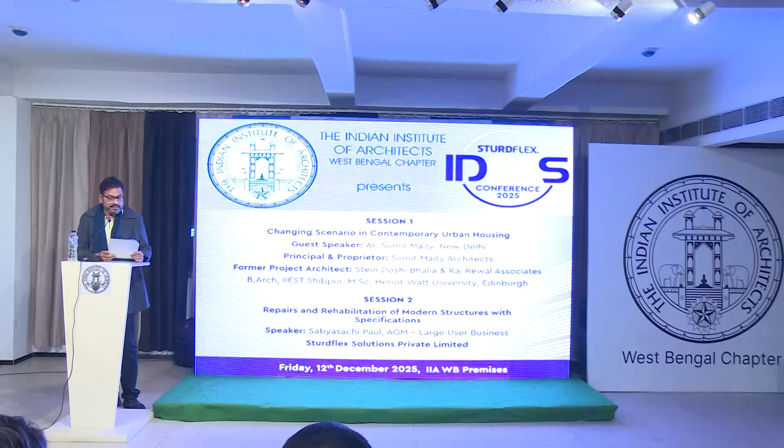Architect Sumit Maity briefly served as a visiting faculty at the Sushant School of Art and Architecture and has delivered invited talks at various prestigious institutions and forums, including Indian Town Planners Institute, TVB School of Habitat Studies New Delhi, Indian Institute of Architects Convention in Surajkund, BMS College of Architecture Bangalore, NWPBC Convention, JNTU Hyderabad, and many more. He has also served as an eminent jury member at key industry platforms such as the IIA West Bengal Chapter exhibitions and IDAC.

These are just a few accolades, achievements and projects to talk about architect Maity. I'm sure we are eagerly waiting to hear more about his projects.

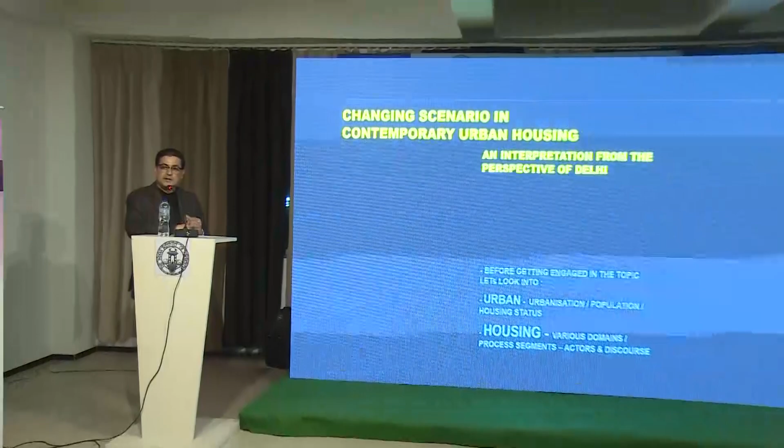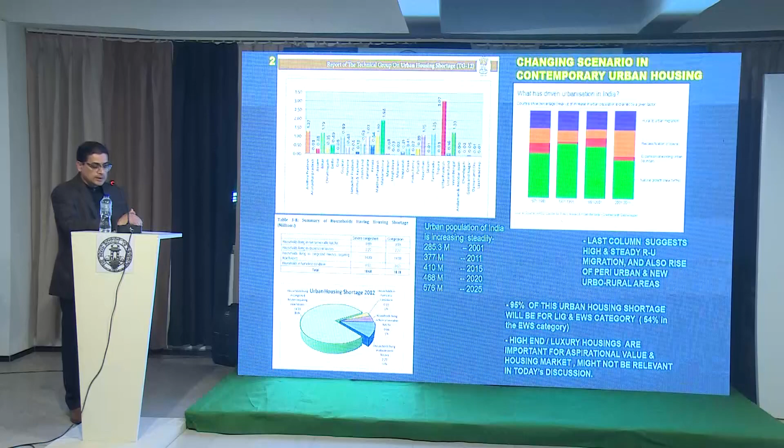So today's topic is the changing scenario of urban housing. Before getting into it, let's first look at the two parts - urban and housing - to understand what exactly these are, so we can narrow down our discussion. Now, when we talk about urban housing, first, if we discuss the urban area, it's a little awkward.

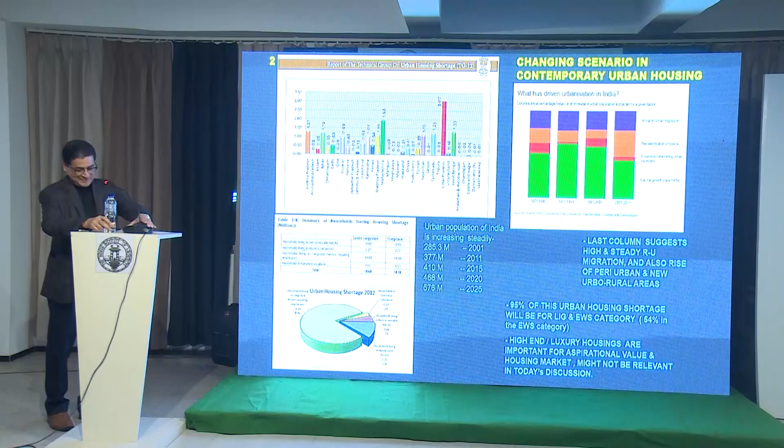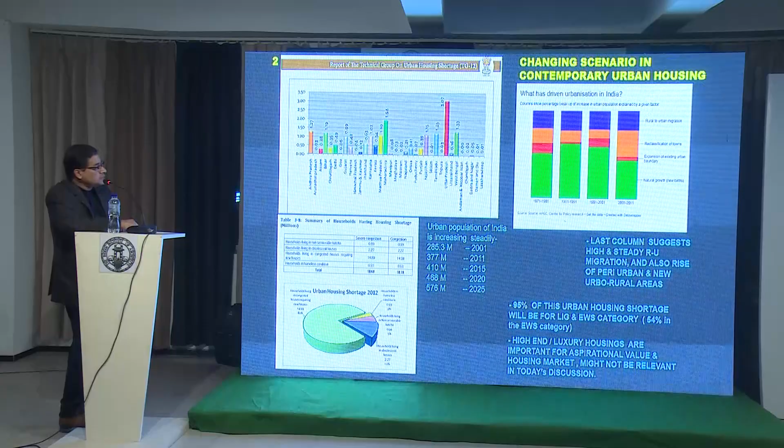Actually, I can't really see the screen. I'm afraid I have to still use this particular TG12 report, done in 2012 - the report for urban housing shortfall. If you see all the states where we have this data, there's about 18.78 million houses shortfall. I don't know really what 2022's 'Housing for Everybody' has achieved, but I believe the shortfall is still there.

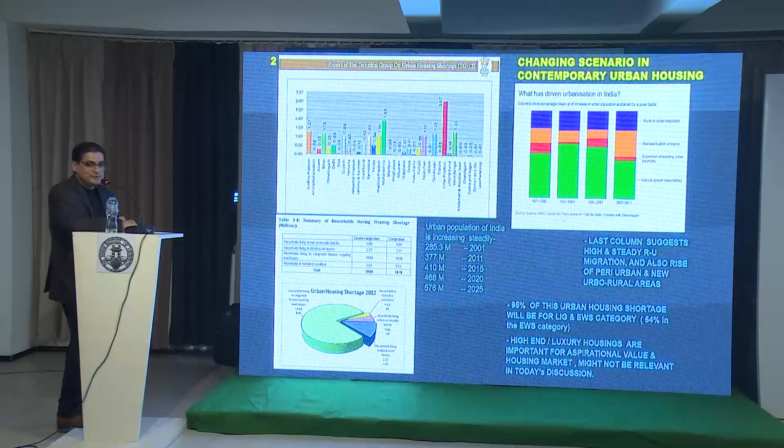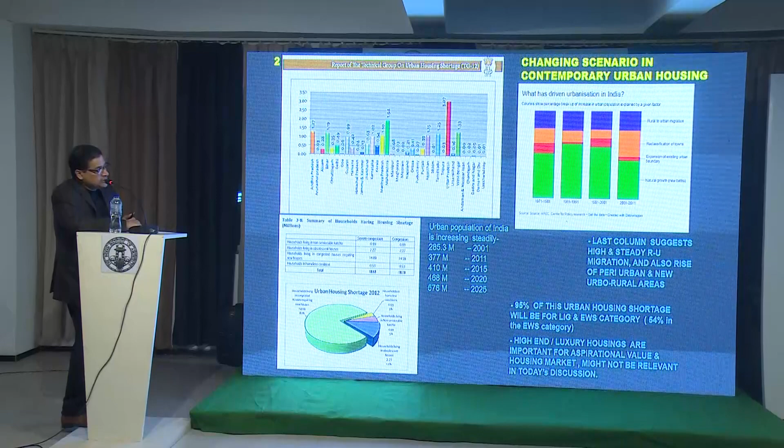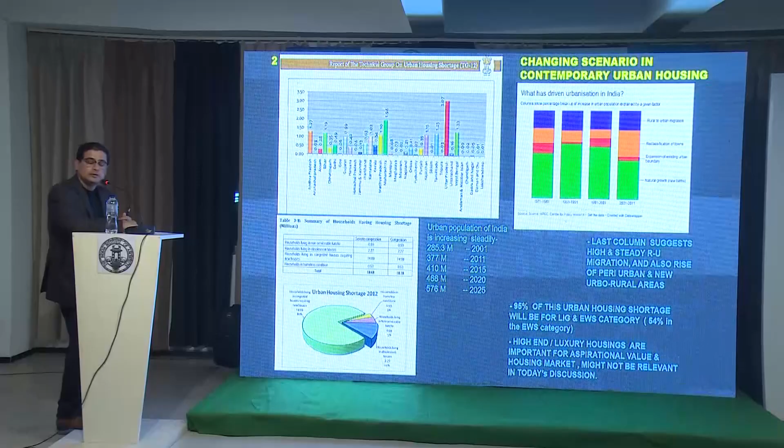Now, why the shortfall, and what about urbanization? The graph on the other side shows the urban population and how it will increase, and the reason for that. At the top we have steady growth from rural-to-urban migration. The last column shown in orange is the reclassification of towns or urban areas - in other words, the amenities in peri-urban or urban-rural areas have improved so that now they can be termed urban areas.

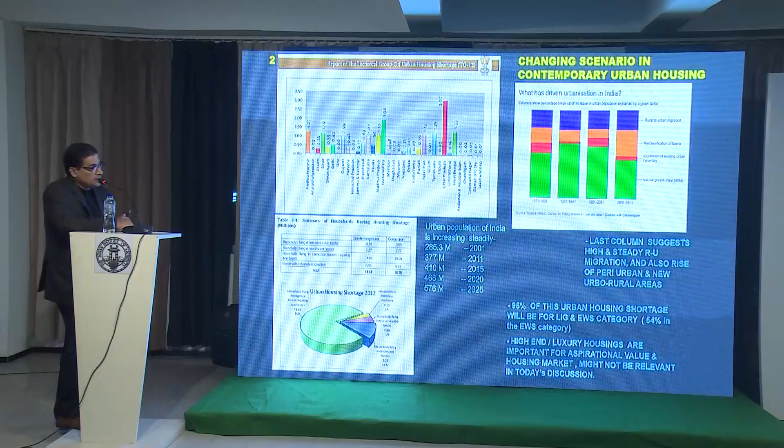Overall, the urban population is increasing, and the moment that happens, land - a limited resource as we all know - is going to be impacted. Now, of the overall 18.68 million shortfall, 95% of that figure goes to the LIG and EWS category - that's basically the urban poor. In fact, 54% of that is for the EWS section.

So what I mean is, when I talk about urban housing in a real sense, we need to address this particular issue. Otherwise, the high-end luxury segment housing, while aspirational, doesn't really give you the right picture.

One small thing here, probably not exactly straight away. Maybe the next slide would be a better choice.

10% of the population, all over India, not only Delhi or Calcutta, held the wealth of 60%. That is something which governs the urban housing market economy, because this segment is very lucrative for private builders to get onto. But the 95% requirement is never addressed by private developers, so government needs more engagement with this sector.

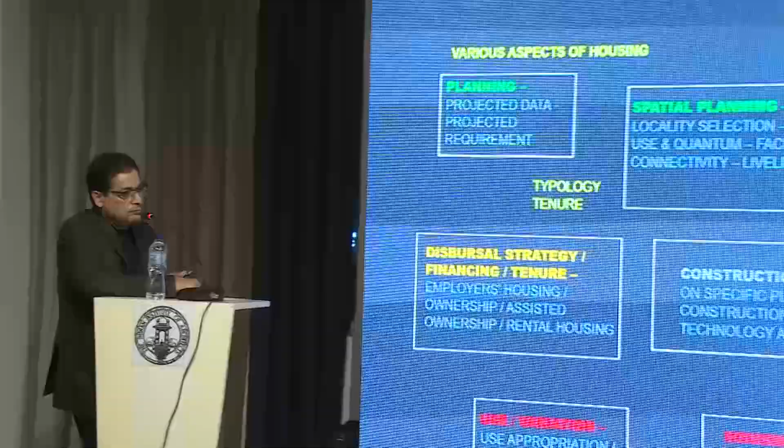Next. Alright, so now when we talk about housing, let's look at the complete scenario. It is not something much bigger than what we see, not only the building blocks and all. The decision makers are actually at different levels. There are various domains in housing, and since I'm addressing a knowledgeable audience, everybody wants to know that. So the planning situation, when they talk about data and projections and requirements, accordingly we pick up things like the 95% requirement.

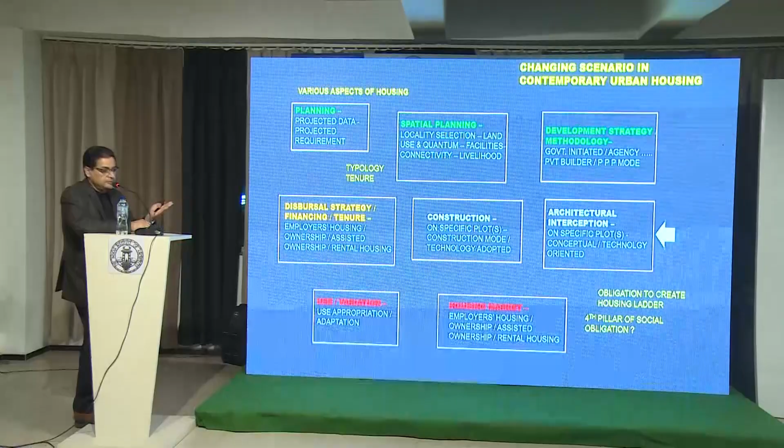We are simply saying we have data and planning data. Then the next possible situation is spatial planning. I'm not really using the term land use plan anymore because that is getting a bit awkward. Now, where you will require the land to be marked, the use to be defined, and accordingly you will have the area, ground coverage, density, and other things. So those are the policy decisions which are made.

Then comes another domain for development methodology and strategy, when you have financing, whether you go straightaway government or establishment-backed project or with PPP and other arrangements. Out of that, there will be intervention of architects, and then obviously with that there will be several other issues, what kind of project it is, whether we need technology-driven solutions, faster delivery, and so on. Construction is another issue.

Disbursal would be another huge domain basically, the way you need to put these things, whether it is ownership or it's going to be rental housing. Rental housing is hardly present here in India. And the other ways are assisted housing, ownership, and all this stuff.

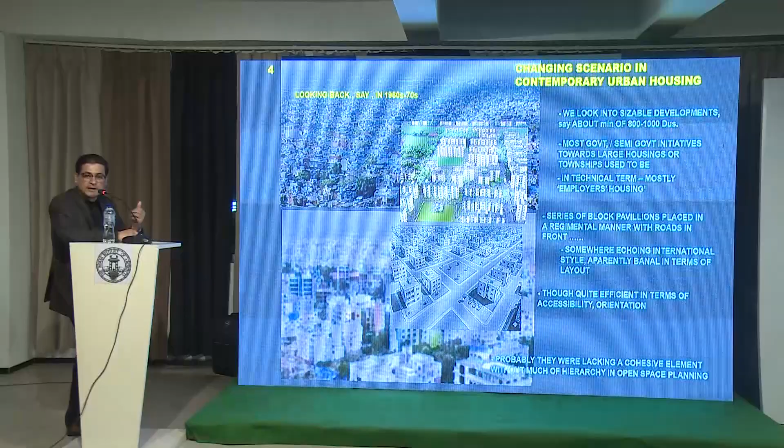Those were the advantages, somebody can say. All the buildings used to have the right orientation, access right up to the doorstep, and complete open spaces and all.

But somewhere people thought that probably it was somehow following the international style, the Bauhaus pattern sort of thing that you see everywhere in other countries. So what was missing? Does it mean it had somehow lacked some kind of inspiration, or the Indianness?

I could show many, but just one or two, three, four images here only to come out with that. So in the late 70s, 80s, we started seeing some other kind of layouts which were not exactly like the typical township pattern.

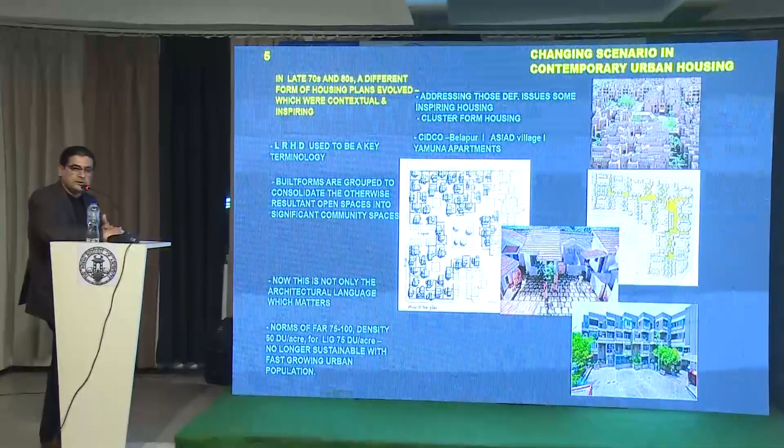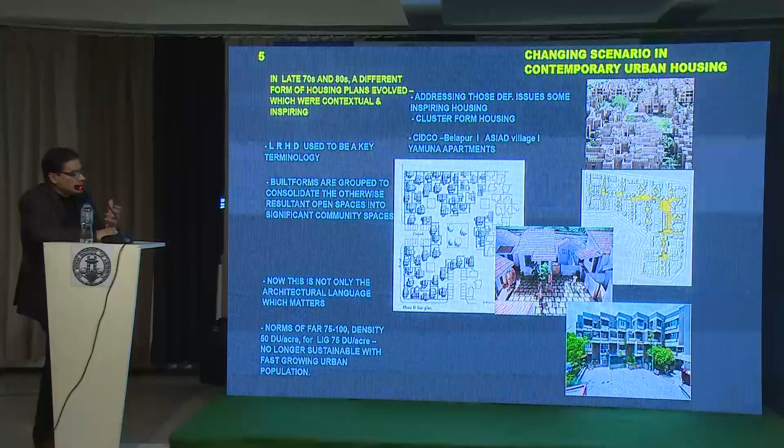You all know these images, they are very well-known. Typically, when we started seeing cluster housing, we see the community spaces as sharing spaces, how that happens. The hierarchy of open spaces - first an enclosed open space, then semi-enclosed, and then eventually a larger community gathering space, like what Charles Correa did in the development.

I won't say this really qualifies for today's discussion because it was not that big a project. In terms of numbers, we should look at projects which are possibly around 1,000 dwelling units - then only it will make an impact.

And of course the other one we can talk about is the Asiad village. We see the pedestrianization, the way the clusters are there - complete proper order in the open spaces, increased open spaces and all.

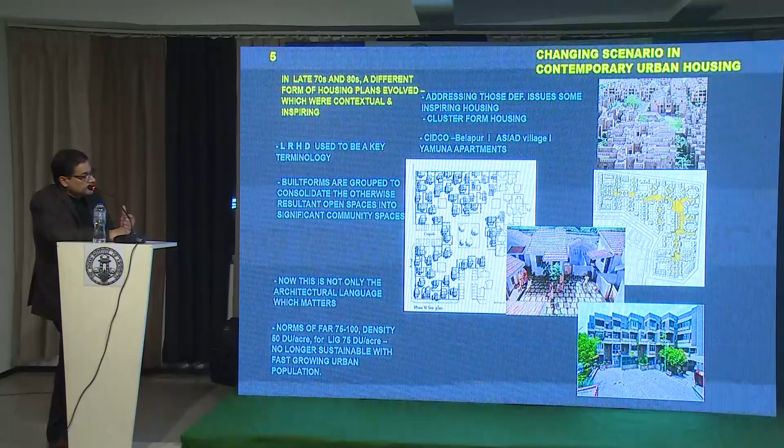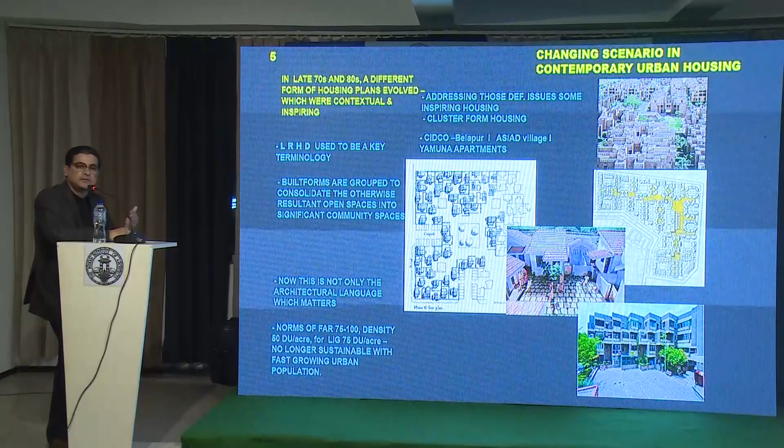And there are certain other small houses, again the same thing. It may not be really that big a project, but it was giving some kind of direction - that housing should be something which actually creates a community feeling.

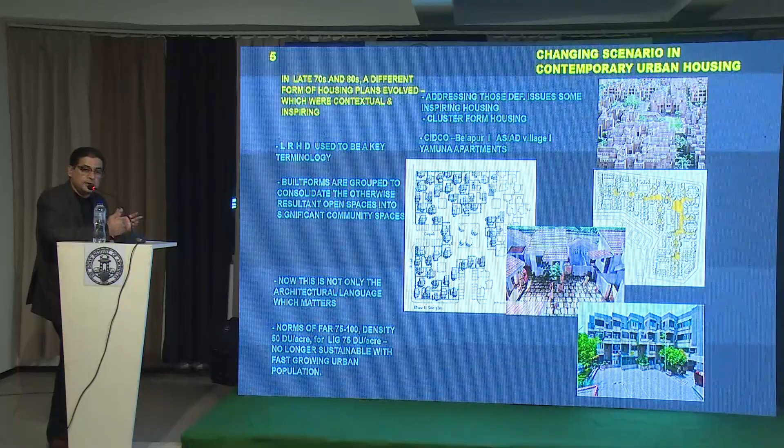Then we learned to figure out the use of open spaces, because our climate is quite friendly, unlike the West. So we could use that open space for various uses, not only at the ground level - even the terraces could be used that way. There are certain other antitheses also to that, but we'll come to that later.

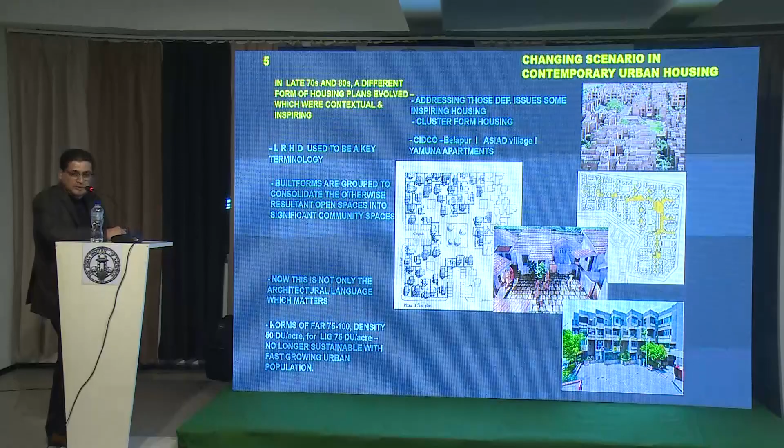So this is the thing - but we must understand that when we're talking about the 80s, the norms were still like this: the FAR was hovering between 75 to 100, and the density was barely 50 odd dwelling units per acre.

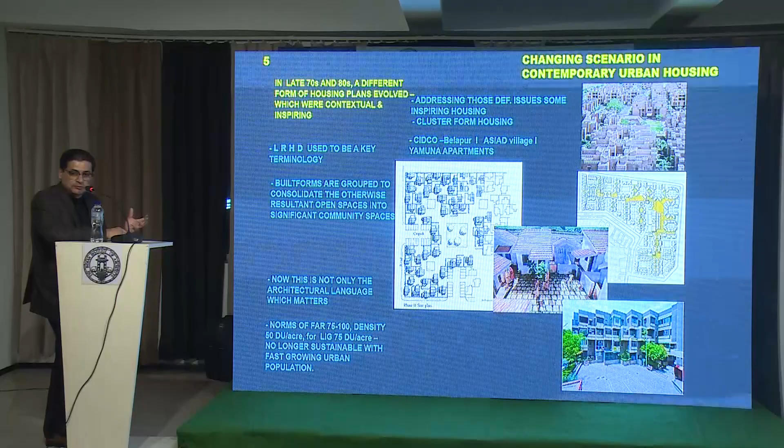But you have seen that graph - the population was increasing, the density was increasing, so we were getting tremendous pressure on the land chunk. It was not sustainable that way. So we could see how it needed to evolve.

So this is the thing basically - during that time it was '99. This is the competition that we won, for Vasant Kunj. It was a 25 hectare site, divided into two parts, and in total it was aiming for 3,000 dwelling units.

What we had done was basically several clusters, designed so that they shouldn't be too big or too small, to have the community feeling. Maybe we were lucky enough to figure out the particular quantum. Someone in another lecture asked me - out of 120 entries, we were the only ones who could give 3 big, large green spaces in this particular project.

So we tried a mixing approach. One part was HIG, then another cluster was MIG and LIG, and another was LIG and EWS. So none of the clusters except for the HIG were actually similar, they were mixed. HIG was similar only because at that time DDA had a different strategy for this HIG - they used a self-financing scheme. That's why it was separated. Otherwise, we were always intending to mix the houses.

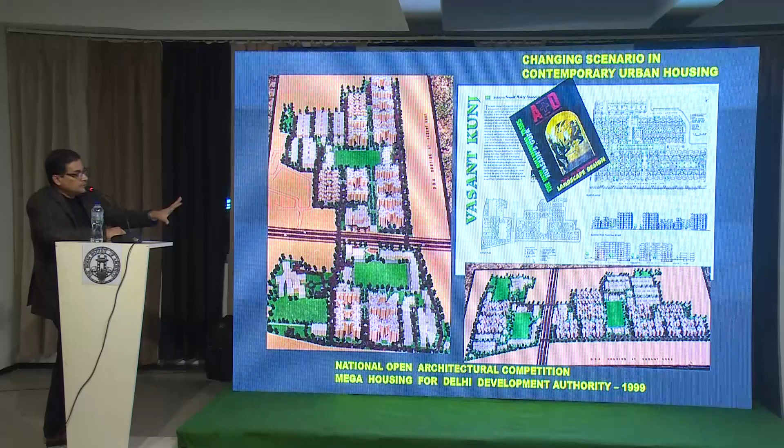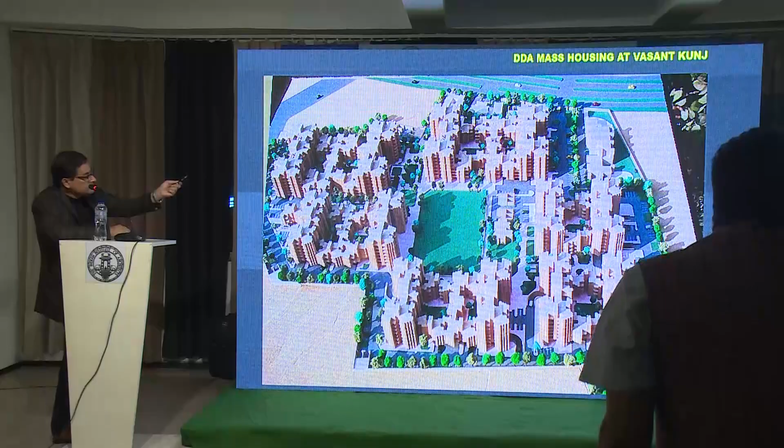So anyway, based upon this, we did the next project. This is a constructed project on the same basis, because we were asked to demonstrate the same clusters done in the competition. Here also, this particular site is 8.1 hectares, if I remember rightly, with total 215 units - 3 BHK, 2 BHK, and 1 BHK. Over there, those 2 clusters are the HIG 3-bedroom clusters, and these 4 are the mixing of 2 BHK and 1 BHK dwelling units.

Now you see this, what we have done over here. This particular area is quite close to the airport, so the FAR was about 150, but we could not achieve that because of height restriction. So what we tried to do over here was mix the clusters - we cleverly mixed 8 floors and 4 floors together so we have balance. Number 2, on the 4th floor area, the lower height, you have a completely separate deck where the entire cluster is tied up.

Otherwise, another thing - I think next, this is a better choice to show over here. Now this is the site plan, so we'll see the flow of the open spaces and the pedestrianization and the vehicular circulation.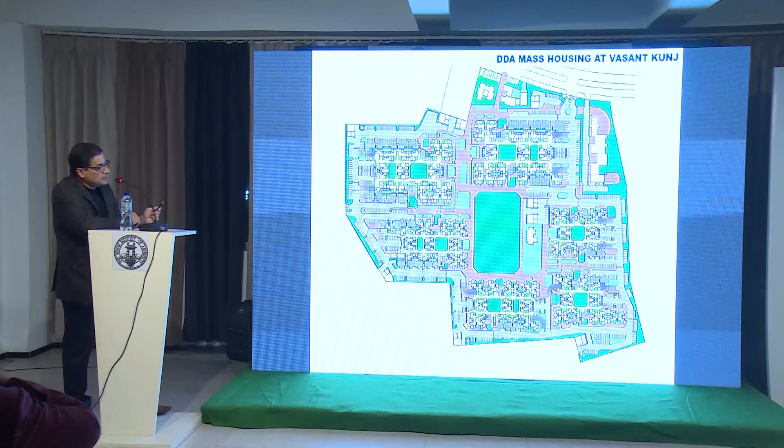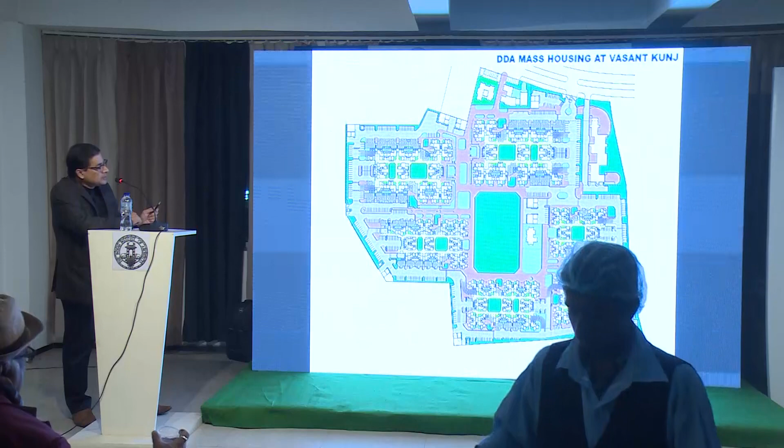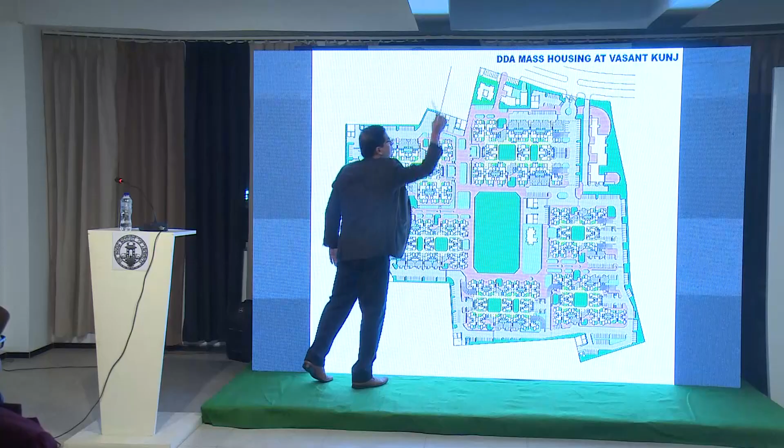Now the system is very simple. The entire vehicular wing goes on the periphery. We have some cul-de-sacs, and this entire pedestrian circulation network is tied up with the city straight away to the bus stop, if you say so. If you see, this entire goes into the main road, right up to the city transport system. Next, these are some views actually, so you'll see the way the 4 floors and 8 floors are combined together.

Next. You can probably see a little bit of this inside the courtyard. You'll see this gateway sort of thing, basically, which are the interlocking courtyards and all.

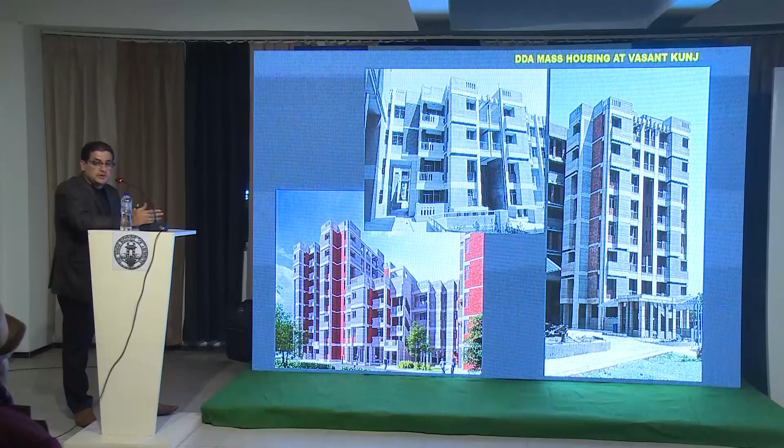Now over here, as I already told you, we could not achieve the complete FAR, but the excuse was basically that due to the vicinity of the airport, the height was restricted to only 8 floors. But somehow the interlocking courtyards, open spaces, community space and other things, we tried to create in the similar inspiration, if I say so, that what we had learned before.

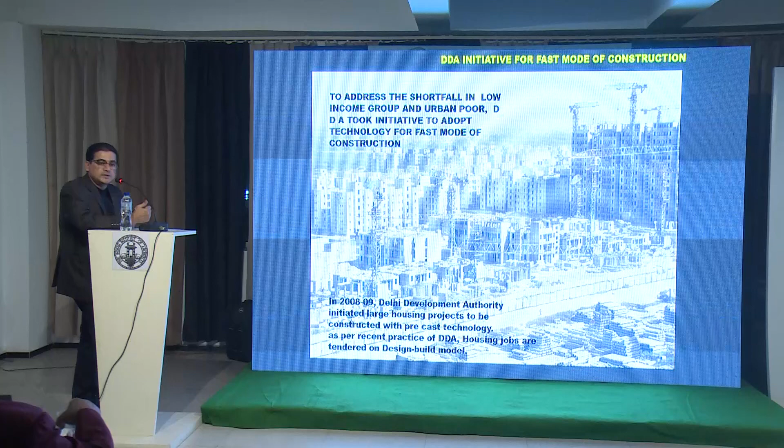Next. But what about the 95% urban poor, for that thing? So we thought we have to give a very fast delivery system, we have to go for this EWS category. So they first came up with a proposal for making 20,000 houses, spread all over Delhi at 9 pockets. And a prefab system was suggested by them - it must be on the prefab structure.

Next. So the challenge here actually was this: you have to create one particular prototype that fits 9 pockets.

The FAR was 200. Engineers simply calculated that 5 floors would be there, because it was G plus 4 without lift for the EWS. So 40% ground coverage, 5 floors, 200% FAR done.

It took time for me to explain to them that 40% ground coverage is not achievable in any way. So they figured this out and eventually accepted the proposal, but we are still 20% down. The thing is, it was a walk-up apartment, so it had to work between these constraints. That is number one.

Number two, there were several other issues like the prefab, because there were certain parameters for the cranes and crane movements, the material, eventually installation and other stuff. Eventually our average ground coverage came out to 33% or so, so it was quite densely done up. So those things had to be seen.

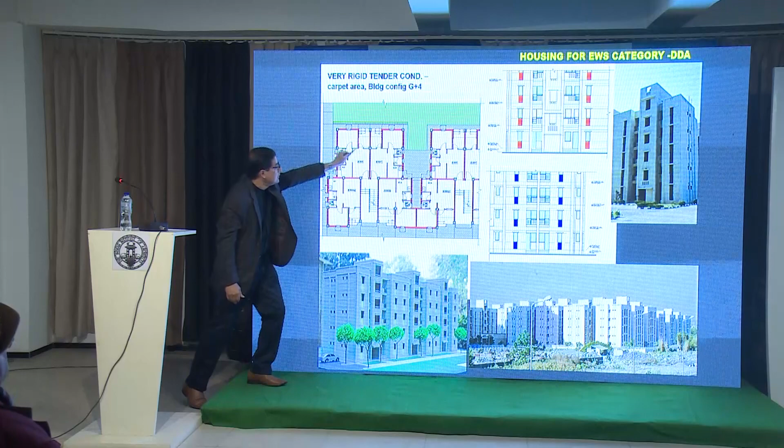In the interest of time, we can save the other questions. I'm sure our main audience will have many questions, so we can save all the questions and take them up later, otherwise it will unnecessarily get extended.

We'll definitely discuss that particular issue.

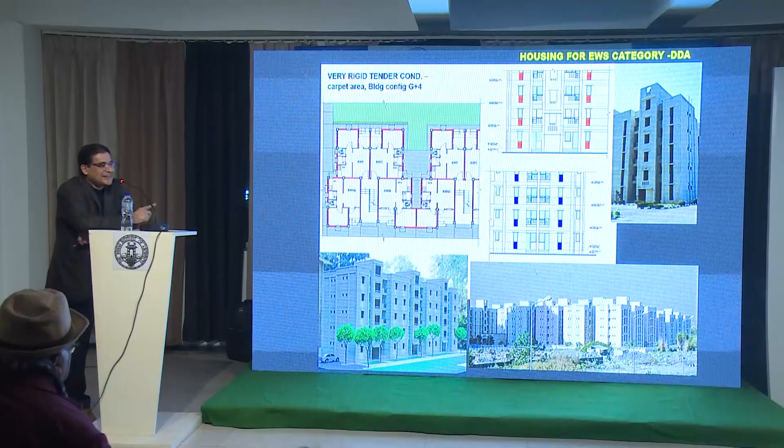So we come back to this, we have done 9 pockets. This is one I'm showing just as a reference. In fact, this was the largest one, about a 10 hectare site that we were looking at. This particular site had about 4,200 units.

Now you see the thing, you will hear what has happened. The kind of building blocks here were basically one complete module, like an industrial production sort of thing. So then, where from, how can you actually get those community feelings and all?

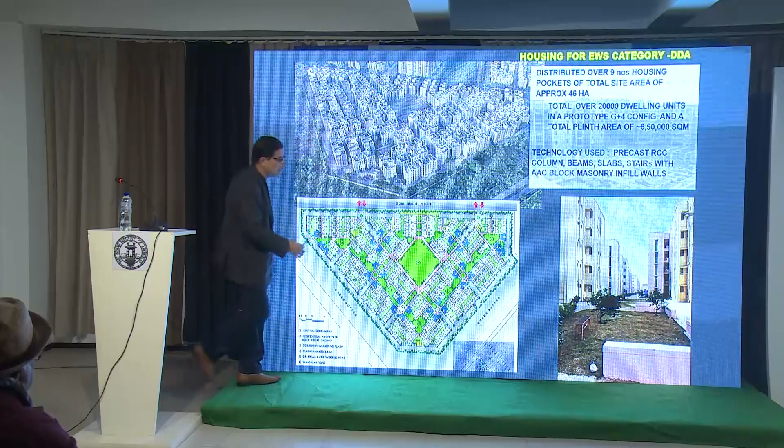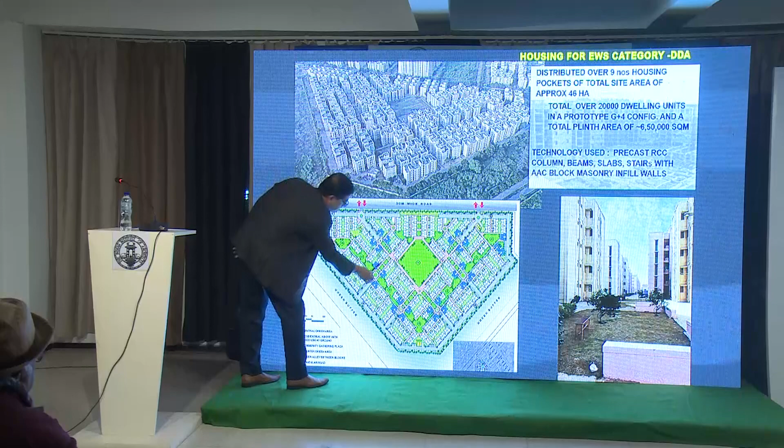If you see here, there are 2 entries. From here you come in, so this is the kind of connection. And then this is the other connection, which comes to the community, eventually to the central green area.

Which one? The blue ones. Yeah, the blue ones have the commercial activity at the ground level. That's what makes this particular boulevard become a little animated. Otherwise it would be like a...

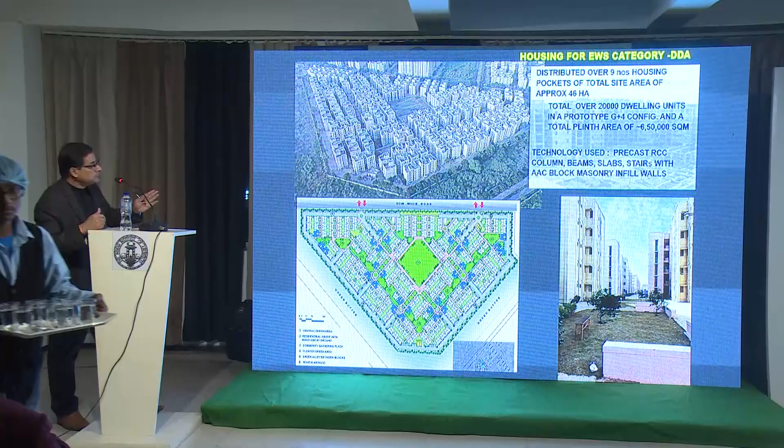That's how we did this, and generally speaking, across all the sites, we must point out that at that time, the norms here, the density and the FAR, the two things we always talk about. For the EWS category, the density was 600 dwelling units per hectare.

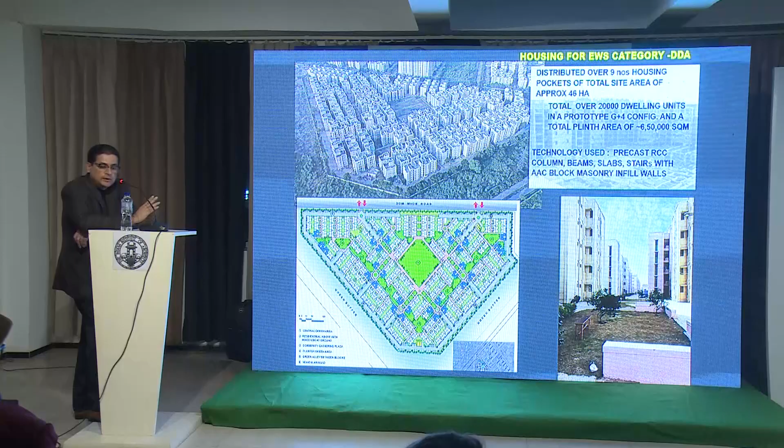So of course we could not achieve it. We were somewhere around 500 to 520 odd per hectare. And FAR also, as I told you already, we eventually did something between 160 to 165, because otherwise this particular model couldn't be sustainable.

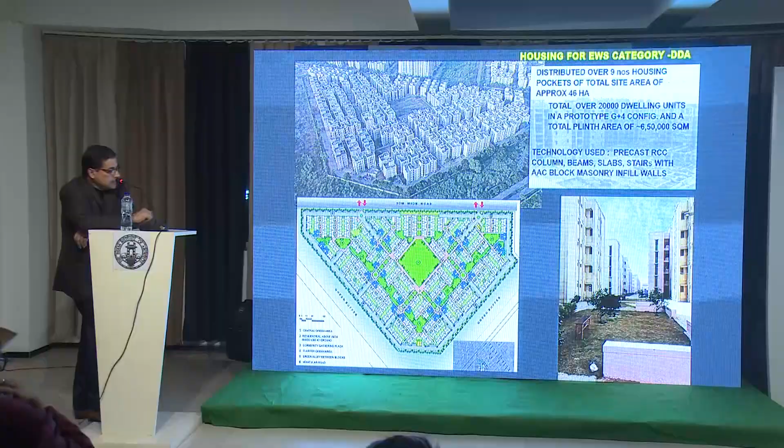Next. So then we came to another situation where they included the LIG, which is basically one grade above the EWS category. This was for 10 pockets actually.

In fact, our site plans are put on the Google map. This is one particular area, this is Narela, these are sectors G7, G8. You will see about 6 pockets were here, and over there also, this is G2, G6. Same thing, they wanted this on the prefab system.

Now the problem here was that the 200, because the height restriction was worked out, so we had to go for 200 over here. Now this was a little tricky.

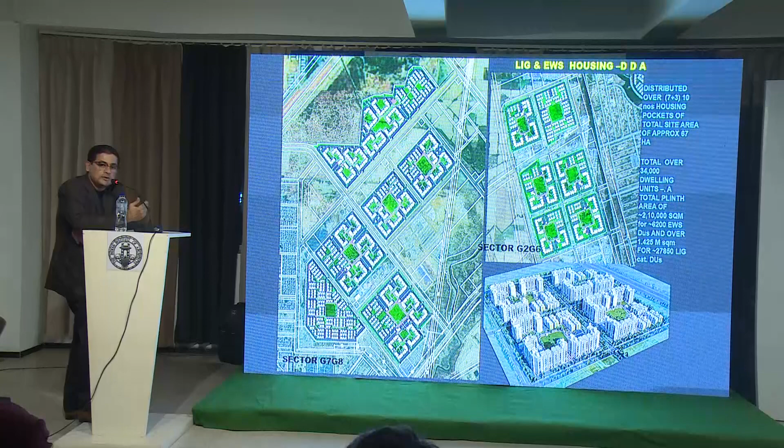For the prefab system, we had to go for a similar module for all. At the same time, all the sites are of different size and different geometry, so how do we get into that particular situation for actually always achieving that 200 FAR?

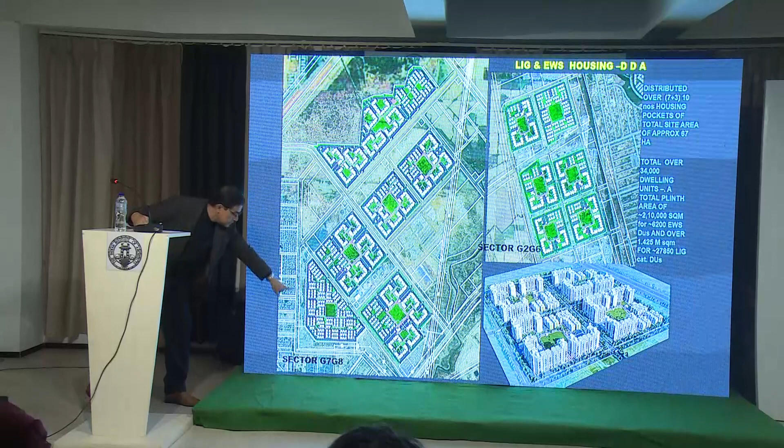I'll explain that, but before we go there, let's see all the pockets. This is the site you saw before, this is the EWS site. Now, all the EWS pockets, you'll see the way the clusters are formed. The LIG blocks were of 13 floors, and for the EWS part, we went with a similar situation that it has to be G+5 without any lift, so they remained in a similar kind of form.

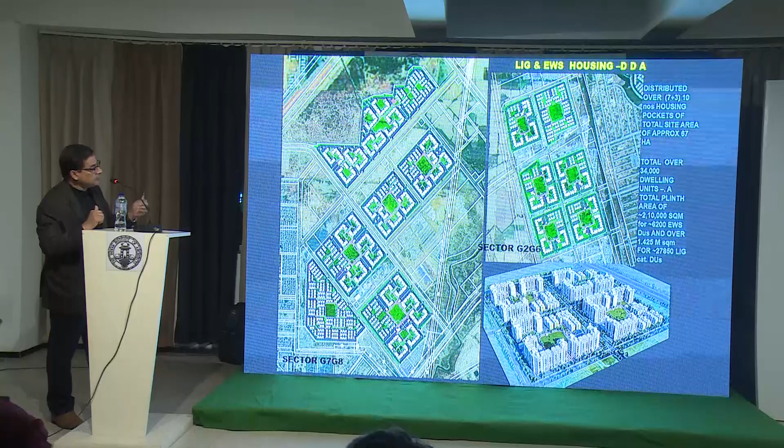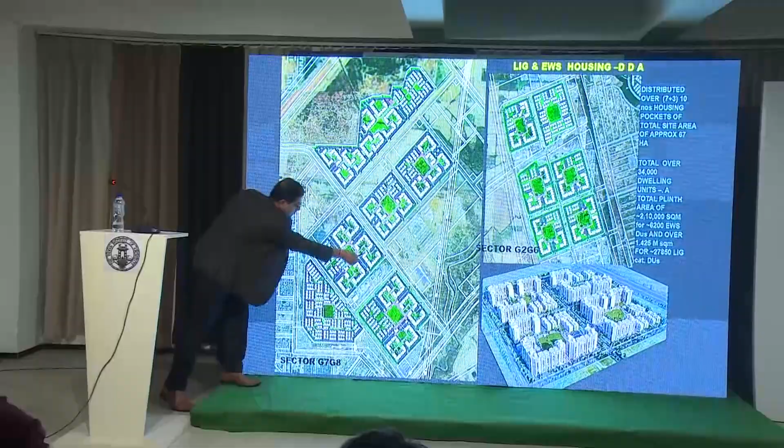Now you see the way we try to do that. We try to create the clusters which are open, eventually connecting there and there, again connecting to the central one, the peripheral vehicular ring, and then the cul-de-sac parking. So it's a completely pedestrianized city core.

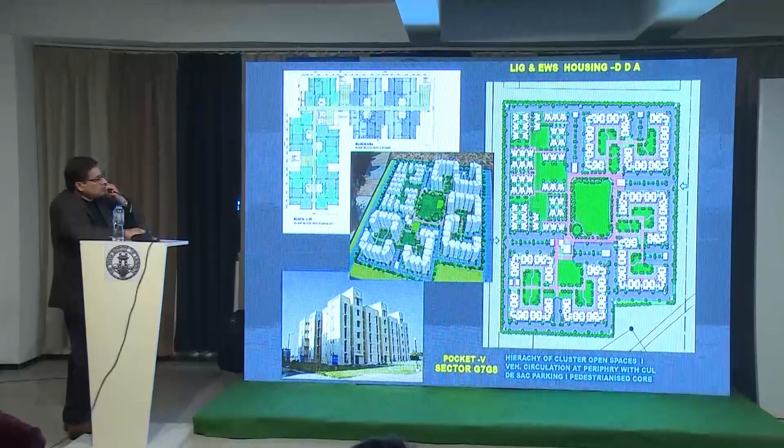Okay, so this is one pocket you can think about. This is a pocket of about 11.5 hectares. I believe the total units are almost around 4,000 odd. So you'll see in detail the way the blocking and the open spaces are actually created in between.

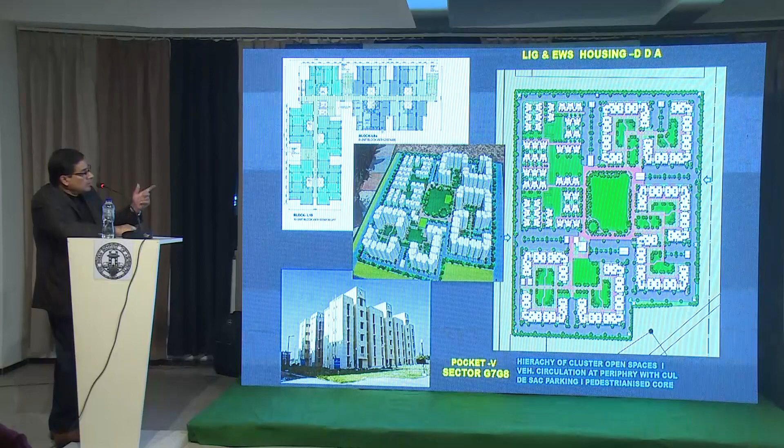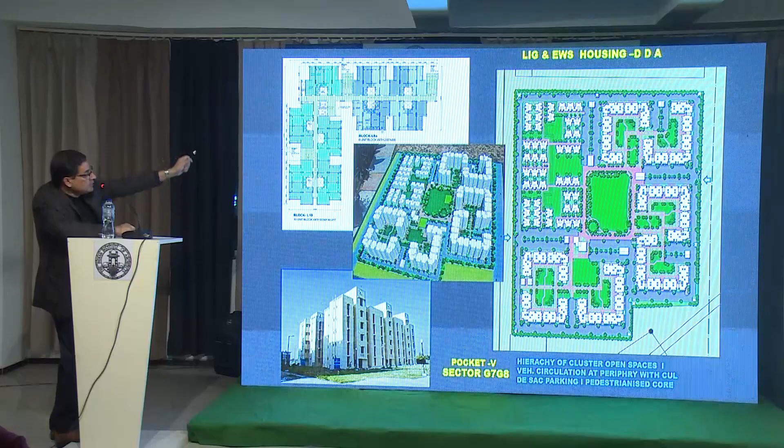Okay, this is the typical LIG block, where we have the lift somewhere, and the staircases are marked that way. Now this is the way we had done next, this is actually the thing that we had done.

We had created one module, L10, meaning this particular thing would be with 10 units. Then L8, that is 8 units, with a staircase or without a staircase. So none of these blocks actually qualify to be a building by itself, they lack something, either no lift or no staircase. But when combined, if you combine three blocks, 2 L10 and 1 L8, then you get a complete building. Add 4 blocks, you get another system, 5 blocks another system, 6 blocks another system.

So that's how all these things differ across all the sites you have seen. We use that approach so that eventually, if the target is 200, we achieve that much. In this particular project, we are talking about 34,000 units that we've done across these 10 pockets.

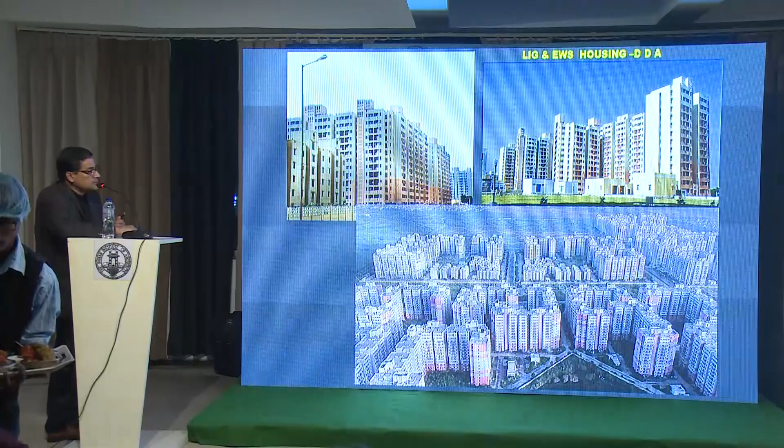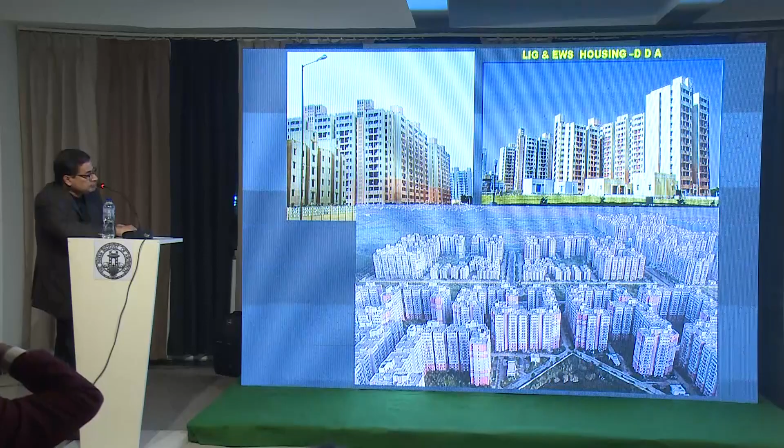So this is a view, if you see, this is sector 11, G7, G8, and this sector 5, sector 6, which have been seen. This is the street view and that's the courtyard side view of the LIG block.

So that's the elevation of this pocket 11. The same similar thing you are seeing, that street view, and this is the same entrance.

So over here, what we have done, we come back to the same issues of FAR and density. FAR we achieved everywhere, 200 or 299 or whatever. Density, the LIG at that time had norms of 500 DU units per hectare, and we could not achieve it, I believe we were something like 450 or 460 odd. That density was achieved.

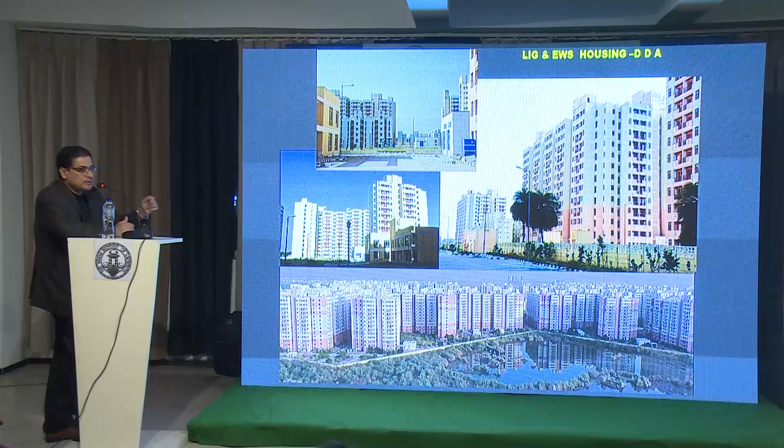Now I'll show one project which may not be as big as these ones. It's a single pocket, but I want to show something else over there, so that is why I included this.

Alright, so this is a housing pocket called UER Heights, in Loknayakpuram, a small site. This is about 3.5 hectares, and the total number of units is about 870 odd, with 2 BHK condominiums and some EWS block, because in Delhi we got to have a 15% EWS component anyway.

I'll tell you what it actually is. So over here, these are the 2 BHK blocks, which are of 13 floors, and this one block is the EWS block. So we have this central courtyard over here, and we are seeing a green patch over here as well.

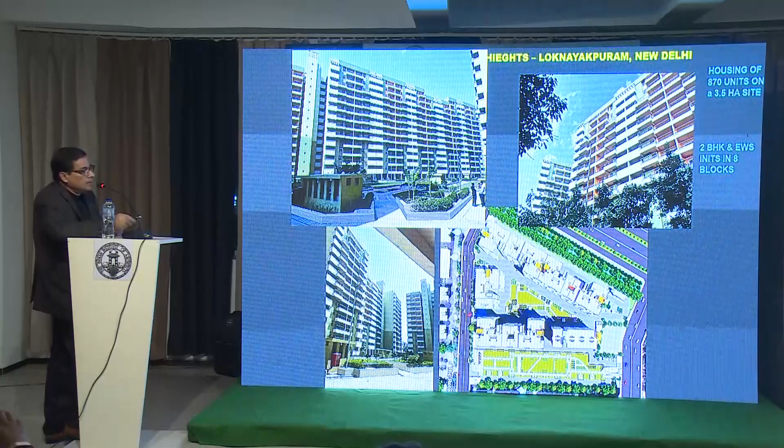So actually this particular thing is quite interesting. This is something new, unique in a sense.

You see this particular plot, and there is one housing existing already before we did this, and another housing over there too. This particular stretch was supposed to be a green space at the ground level, so there was a pedestrian connection planned, though no park existed, but it was in the master plan. So what we did was use this land chunk within the site for the FAR, but allowed this green space at the elevated level so people could go freely from here to the other side without trespassing.

So that's what we've done here - big steps, ramps, and a complete raised garden, and then you go to the other side.

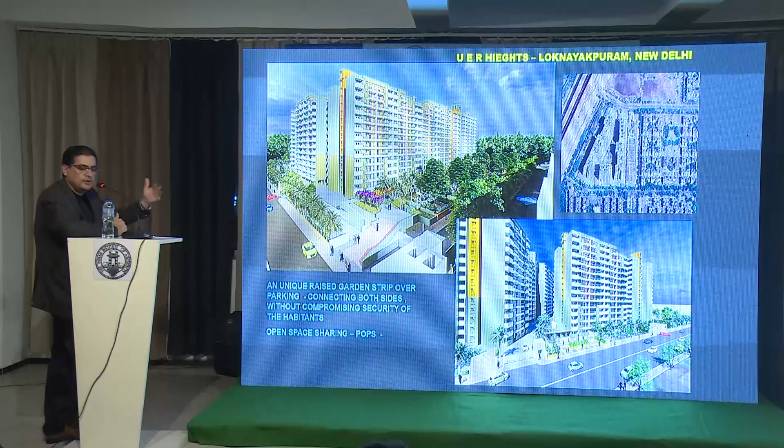This isn't fully qualified as privately owned public space, not exactly that, but when we talk about consolidating green spaces everywhere, even at the urban level, we try to connect them. So we can think of this happening in housing too - both parties use the FAR, but create this openness and connection throughout, if not the entire city, at least this entire sector. This is obviously already constructed.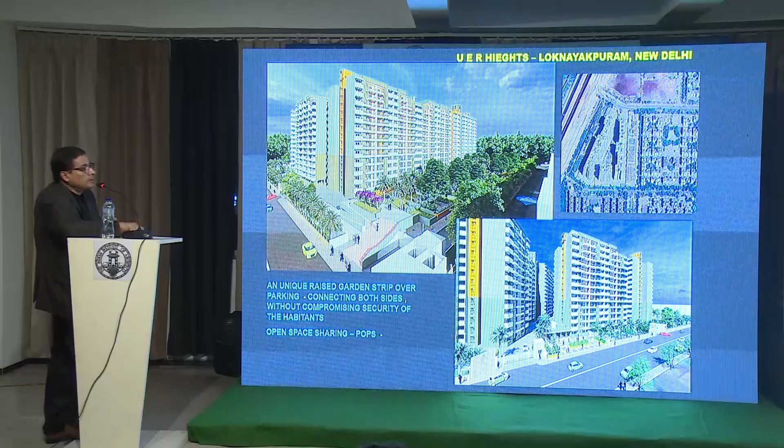Alright, so this gets to another part. This isn't exactly the low income group, but the MIG and HIG category housing. Here we're looking at a sector with 8 pockets, for 3 BHK, 2 BHK, and an EWS component.

The green spaces are there in all this, but the system is a little different. Here we've gone for a higher building height, up to around 18 floors, with 2 double basements.

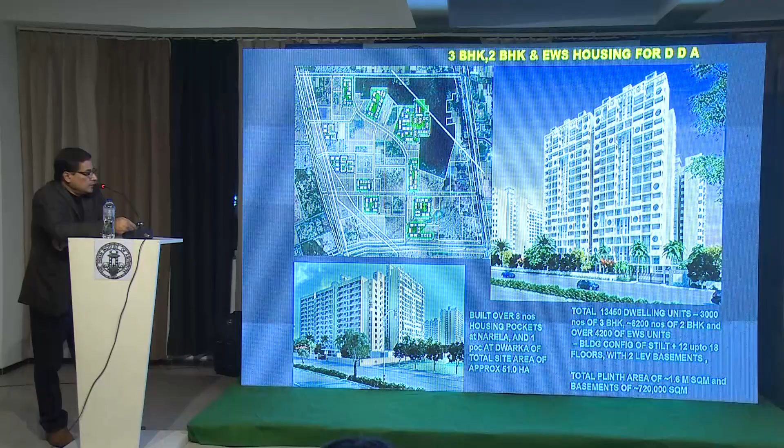So this is the entire view. This is pocket 14, this is 13, 11, 9, 4, 3, over there 6 and 5. So these are the 8 pockets. From here to here is about 1.6 to 1.8 kilometers.

This is a kind of image showing how to have something very easily perceivable in form, knowing it's public housing just completed, so it looks like that. Definitely after 10 years it will show a completely different image. I was thinking, if tomorrow people start covering their balconies into rooms, how will it look?

Somehow I thought this circle is something - if tomorrow someone covers this with glazing, even then the circle will still be a circle. But on a rectangle or square, a wide window versus a narrow one, these two read very differently. A circle somehow still reads the same. So I thought it was a clever choice to go for a circle.

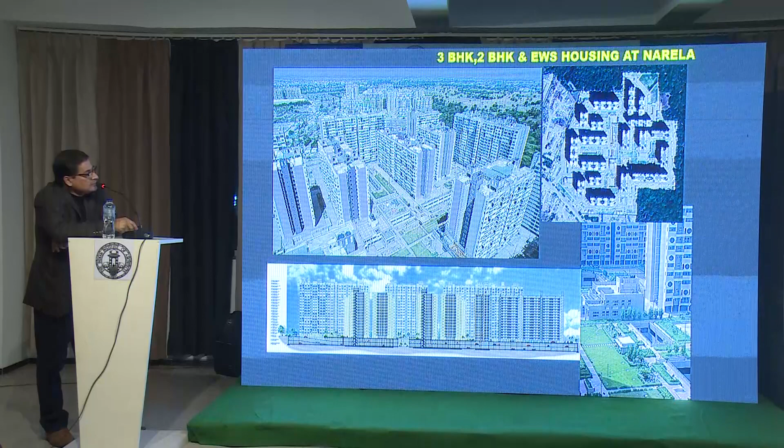So this is what you are seeing. Basically, centrally we have this green field. We are also seeing the same thing, and the blocks were... I would say possibly this is a mix of our courtyard, the community spaces, plus somewhere the national style, but it is little different from what probably we saw in Basant. It's more like the building blocks are standing and trying to define an open space, which we're trying to enclose, whereas the Basant was much more organic, I would say.

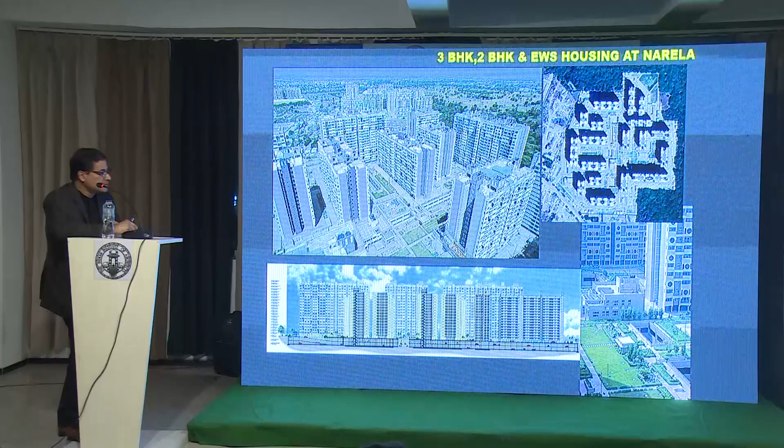So why so? Possibly the one basic reason is that we are going above the ground. Now it is no longer really at the walk-up apartment sort of situation. So the moment that particular system changes, everything changes. This particular pocket is having a double basement here also, so you can see a little bit of voids here so that light goes to the basement too.

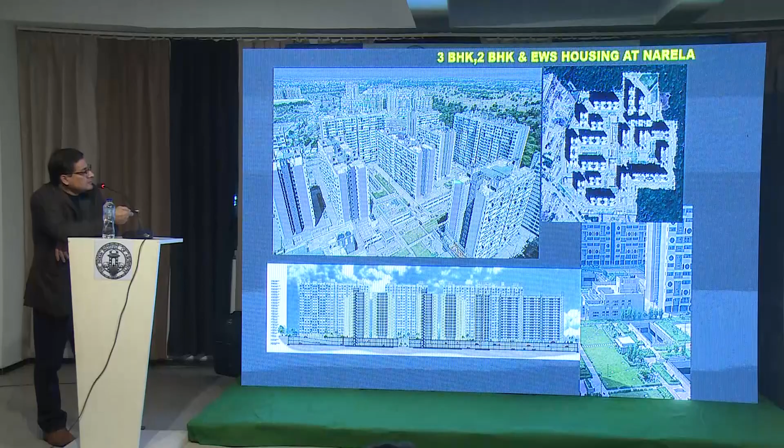Next, this is pocket 13 I guess. Yeah, so all the green spaces are here. You have the community halls, the sitting areas and all that stuff. In fact, this is the guardhouse. This was also created in a similar kind of fenestration and the ceiling void as well.

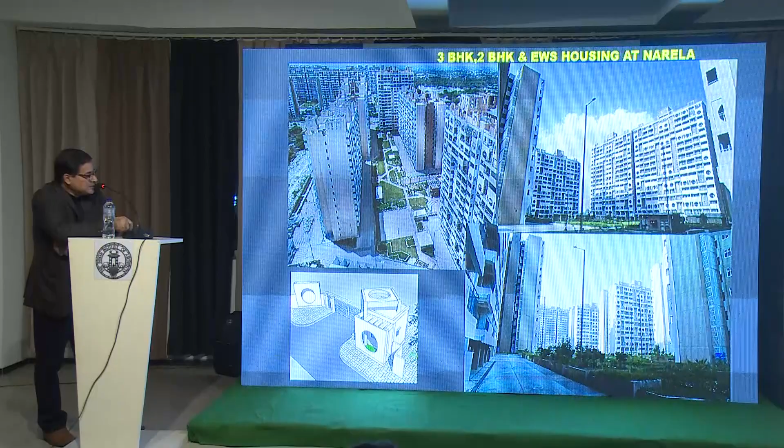Next, alright. So what we have seen basically is that the FAR has gone really up. So now the changes have happened because the density is going up, the FAR is going up, and the land quantum actually hasn't really changed that much.

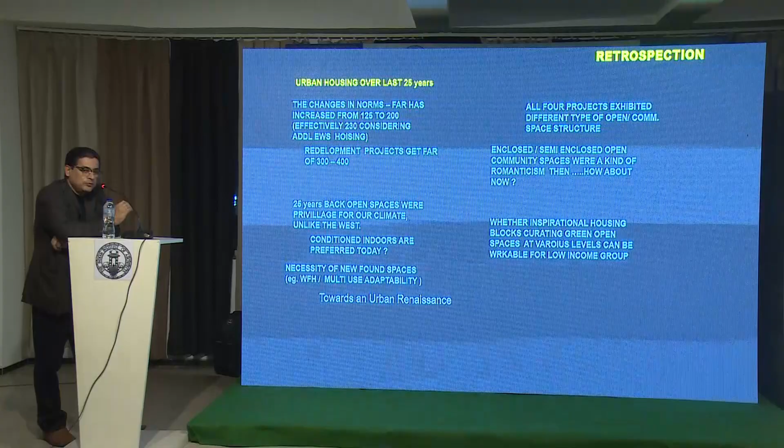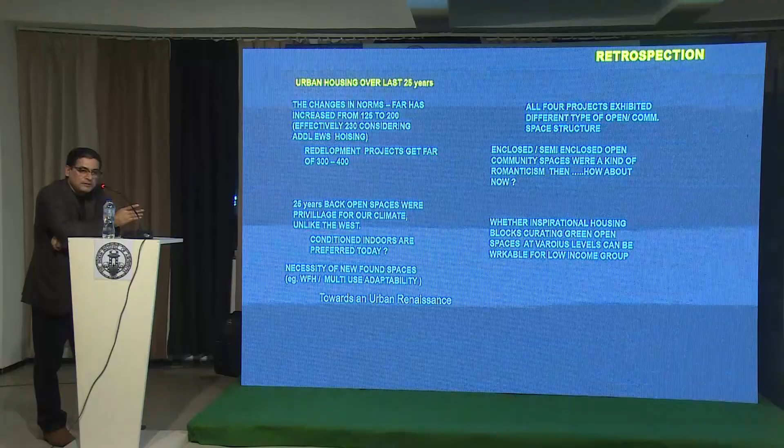Now, in the redevelopment area - so what I showed you of this 200 FAR thing, but otherwise if you go to the redevelopment part, it goes up to 300 to 400, even higher. We had done one redevelopment project also, but I believe it is not included here. That was also about 5,000 houses.

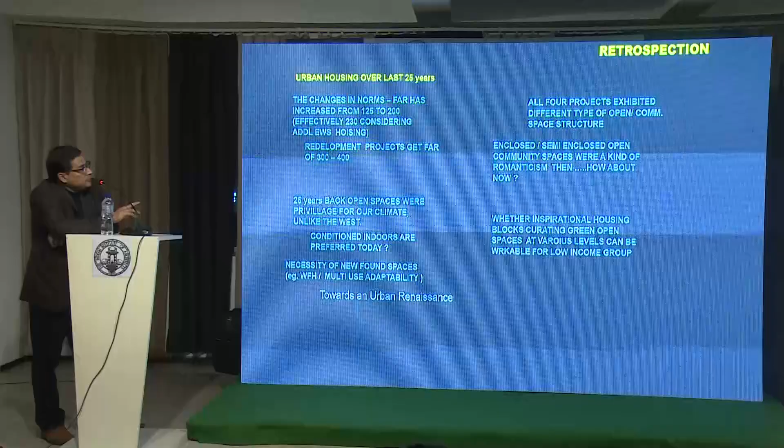So one essential question we now ask is, it's not only the market force or the requirements of the client, but how about our own needs? Have we changed at all over the 25 years? When people used to advocate for outside spaces, terraces, balconies, courtyards and other stuff, are we really interested in that anymore, or are we completely depending on air-conditioned indoors? What is the situation like?

So, are we going to be too sentimental about it? Are we unnecessarily trying to romanticize the courtyards and the community spaces? Do we not need that? That's a question basically for us to ponder.

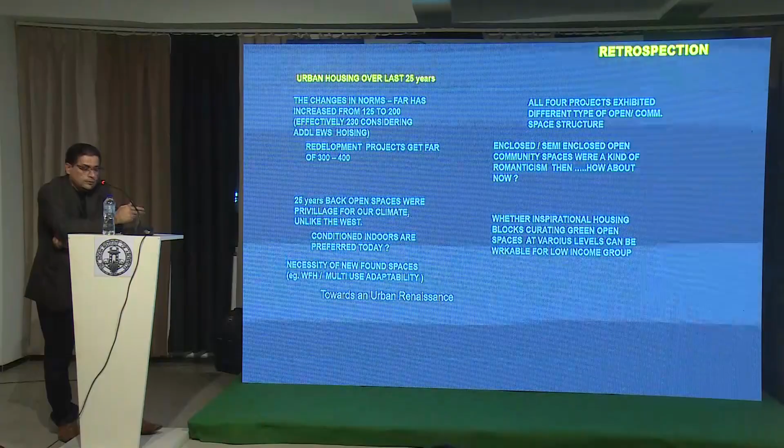And obviously, we have figured out some new things, let's say specifically after COVID, that we need to have work-from-home sort of situations. And one big thing - not just including the dwelling unit, but as a community - is that we could possibly need some spaces which can be used for multi-purpose roles, let's say even running a temporary school sort of thing.

I believe many of you possibly know about Towards an Urban Renaissance, which was done by the UK government, and Sir Richard Rogers was the mentor, the main person over there. What Rogers was advocating was that most buildings should be designed so that they can be appropriated for other uses. I believe London or similar surveyors have seen the maximum densification, so they understand possibly the significance of that. We still have much to understand, so we will see it later.

So let's face the fact - after COVID, when everything was closed, I remember one of our housing projects at that time, they were not sold yet. So many housing pockets there actually put in people who were COVID infected. So they became those sanctuaries. So okay, we had those housings, but how about the normal scenario?

So you'll be needing something, if not at every housing compound, but probably at a sector level. We should plan for those things. These are some new requirements you should possibly think of that way. We have seen the evolution of these open spaces in our projects as well.

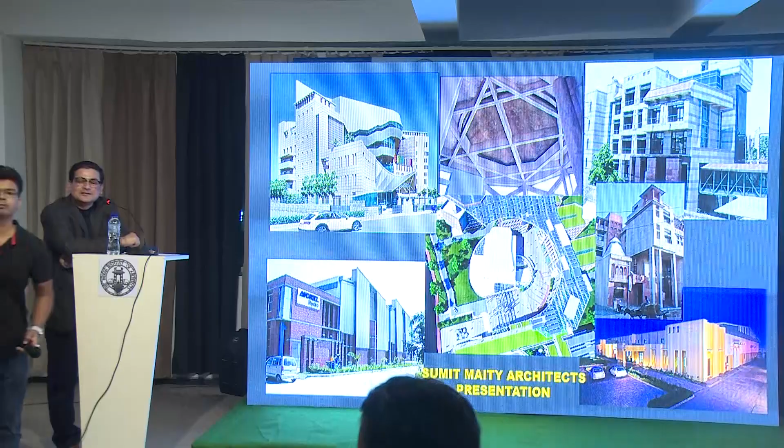Yeah, sure. You were talking about the setback of 200 and 400. Is it 2 or 4 actually? No, see, 400 is for the redevelopment area. I understand, so how could it be 400 if you are all over the places, like 5, 6? Okay, no, that is...

In Delhi, that is actually basically - that is the terminology the DDA master plan uses. They use it basically like 100. Actually, it is 2 or 4, whatever you were saying. Yeah, so they get confused.

Your excellent work, Sumit, reminds me of my friend from Heriot-Watt, who used to work for DDA. That was the time when DDA had excellent area planners in their own department. Now they have to outsource because everything has deteriorated. But your work reminds me of that, because it's very precise work.

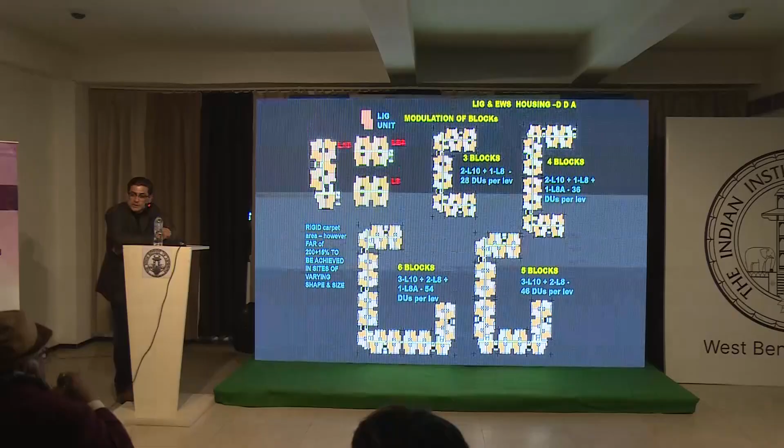For the 3 BHK houses - for 3 BHK. This is entirely on prefab, this project is entirely on prefab. Is it a 4 BHK project? 3 BHK, yeah. This building is a prefab building, since it's RCC.

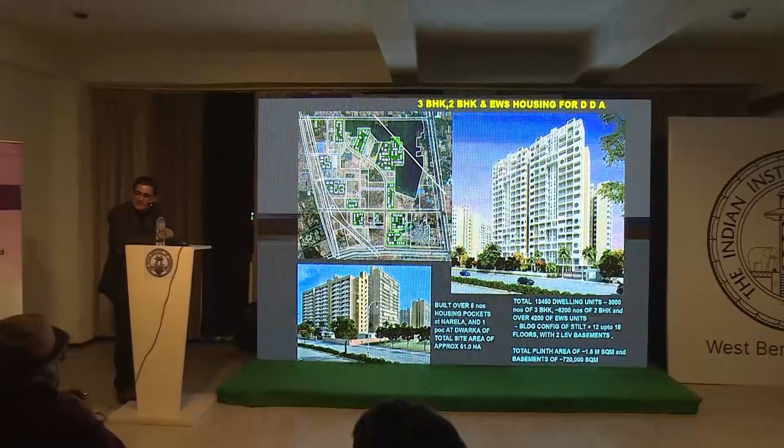What kind of technology do you use for fixing of the elements? Well, I don't know exactly what you are asking - this is what we have done over here. The seismic consideration is there, already vetted by IIT also. Because this particular system, the joints are not dry joints, they are wet joints. The compression steel actually goes inside, that is done in situ. A slab has got 2 levels, where all the tension reinforcements are done in the yard as precast. The compression steel is put in at the moment it's installed - the beam compression steel and the slab go all together, and then you pour the concrete. So that's a wet joint. So I understand your fear - the moment it is a dry joint, there is a problem of failure, but when it is a wet joint, that substantially reduces.

We haven't used dry joint here. Can you give us any plans of these modules? I guess I'm not carrying some other lectures, probably - no secret, I was given some kind of subject and I was trying to just play around with it.